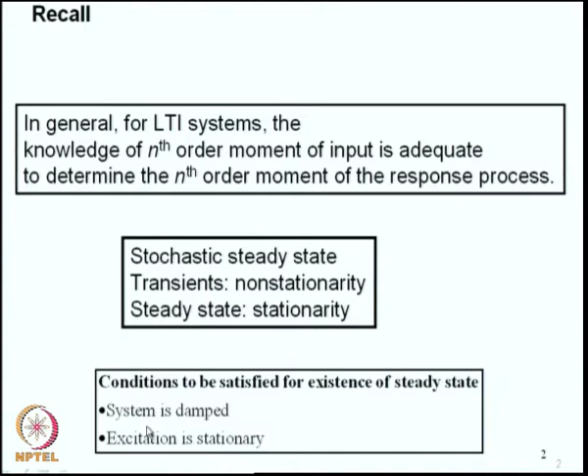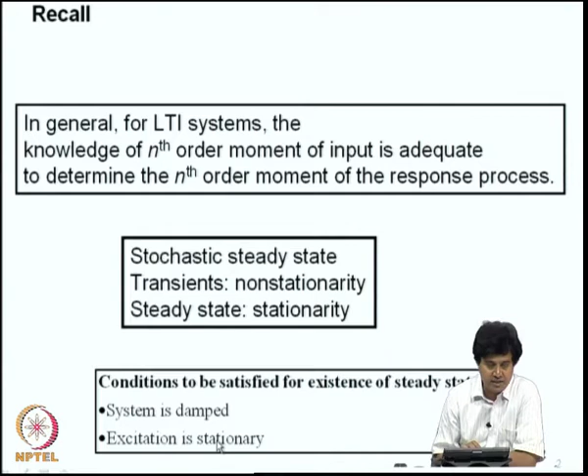For the system to enter into a steady state, the conditions to be satisfied for existence of steady state are that the system should be damped and excitation is stationary. If system is undamped, no steady state is possible, and similarly if you apply an excitation which itself is not stationary, there is no possibility of a stationary response.

The input output relation in frequency domain related the power spectral density function of the response to the power spectral density function of the input through a transfer function which is a square of the frequency response function. This is valid only in the steady state. We will continue this discussion.

Now, we will consider the response of a single degree of freedom system to a stationary random excitation. Till now we have considered f of t to be a white noise process. Now, we will consider more general forms of stationary random inputs. We will consider that the system starts from rest and mean of the excitation is 0, and the autocovariance of the excitation process is given by this, where the autocovariance is function of the time difference T2 and T1.

We will start with the Duhamel integral representation for the response. Since the system is starting from rest, the Duhamel integral representation provides the complete solution. h of t is the impulse response function, f of t is the excitation. Now, if you take expectation on both sides, you get expected value of x of t is expected value of this integral, and that itself is this integral 0 to t h of t minus tau, expected value of f of tau d tau, and since expected value of f of t is 0, it follows that expected value of x of t is 0 in this case.

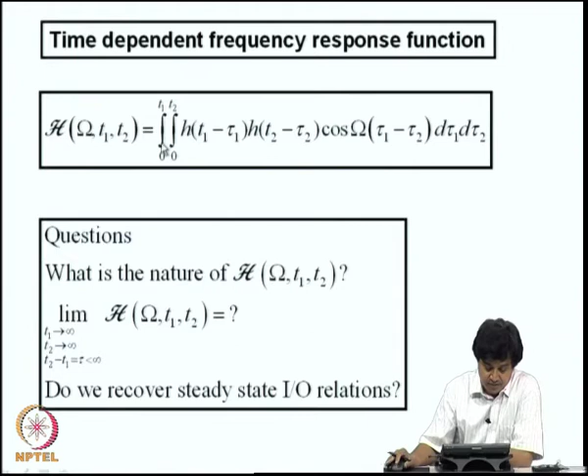Now, the impulse response function is given by this for a damped single degree of freedom system. If I now substitute this into this integral for h, this is a known function. So, for h of t I will write this function and carry out this integration. If I indeed do that, I get this lengthy expression. This h of omega whole square that appears here is the modulus square of the frequency response function that we have encountered already. This capital omega is a frequency parameter which appears at various places here.

Now, clearly this h is a function of both t1 and t2, although at a few places the time difference also appears, but if you look at these multipliers, it is a function of t1 as well as t2. Now, if I consider the limit of t1 going to infinity, t2 going to infinity and t2 minus t1 is tau, which is finite, what would happen? Clearly these exponential functions, since they are multiplied by time and time goes to infinity, go to 0. So, these terms inside the brace will vanish because I am multiplying by an exponentially decaying function, and therefore, these two terms will vanish.

Similarly, there is another term here inside this brace, which is multiplied by minus eta omega t1 plus t2. As t1 and t2 become large, this function also becomes 0. Therefore, the only term that we will be left with will be this h of omega whole square into this cosine function. Please notice that there is a bracket running across these terms, it begins here and ends here, and the entire term within the bracket is multiplied by h of omega whole square. So, what would remain as t1 tends to infinity and t2 tends to infinity, with t2 minus t1 being tau, is only this term h of omega whole square cos omega tau. So, I get this one.

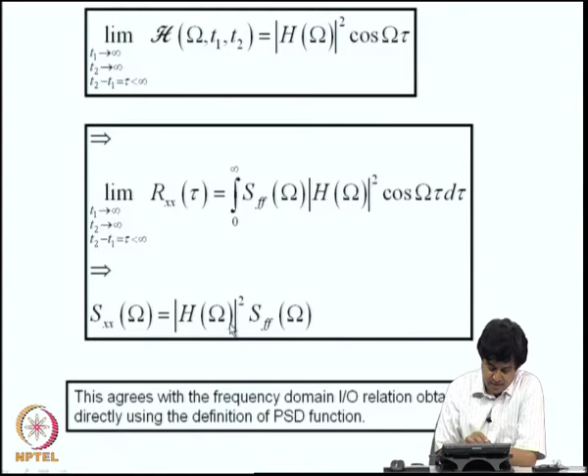So, therefore, under these limiting operations, the output autocovariance function is given by SFF of omega h of omega whole square cos omega tau. Now, seeing that this is nothing but the Fourier transform of Rxx of tau, we can infer that the output power spectral density function is given by h of omega whole square SFF of omega, and this is what we have already derived by using a frequency domain analysis of response in the steady state. So, this agrees, and it is nice to be able to verify that.

So, we have the output power spectral density function is input PSD multiplied by square of h of omega. So, the steady state variance is given by area under this function and this is given by this. Suppose if we take the case of a white noise, then the output PSD function, if I now substitute into this, I would end up needing to evaluate this particular integral 0 to infinity, and this is a rational function, a polynomial in omega.

Evaluation of such integrals can be carried out using Cauchy's residue theorem, using contour integration in complex plane. I leave that as an exercise, and the exercise is to evaluate this integral using the residue theorem and show that this steady state variance is equal to the value that we have already derived using frequency domain analysis.

There are few integrals that will be useful in frequency domain analysis of randomly driven systems. I have provided it here. The structure of these integrals are as follows. In the integrand we have ratio of two polynomials in omega, and for different values of n, for example n equal to 1, h1 of omega is b naught by something like a plus omega, and I1 is given by this value.

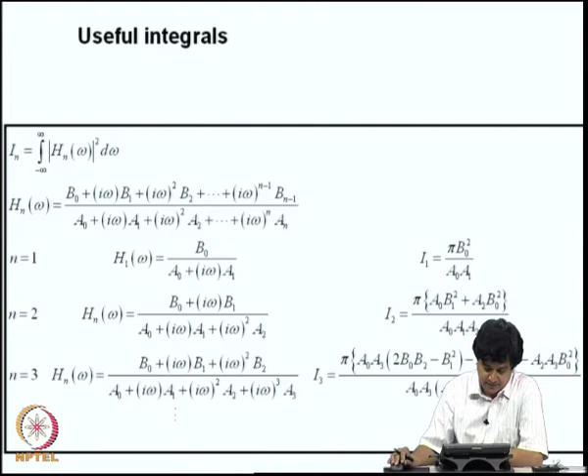We have seen that the steady state response variance is given by this integral 0 to infinity h of omega whole square SFF omega d omega. If SFF omega is a white noise process, then it will be a constant and we will be left with evaluation of the integral 0 to infinity h of omega whole square d omega. But if SFF omega is not a white noise, it may be possible to evaluate this integral using an approximation which is explained as shown here.

So, for purpose of an approximation, in regions where the frequency response function has significant values, we can approximate the power spectral density function as a constant, and we can ignore this variability. So, if I now replace the power spectral density here by its value at capital Omega equal to omega n, and pull it outside, that means you are basically applying a white noise excitation pitched at this value.

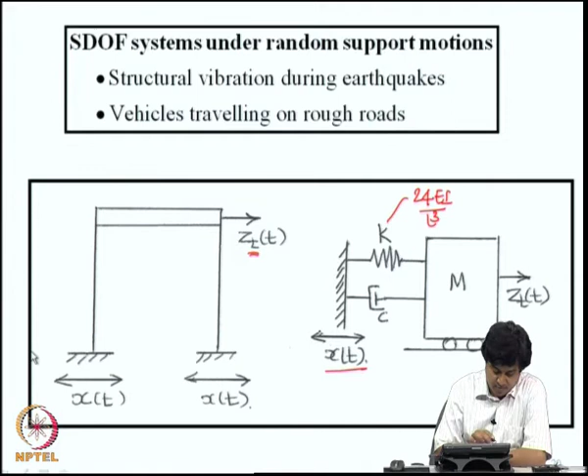If we now set up the equation of motion for this vehicle, we will get this equation. Mu double dot is the inertial force, and the force in the damper is c d by dt of u minus y of x, where x is vt plus half a t square. Similarly, the force in the spring is k into u minus y of x, where x is vt plus half a t square, with the initial conditions u of 0 and u dot of 0 specified.

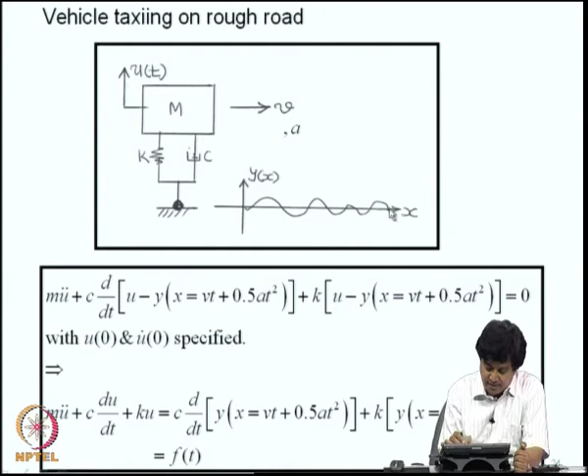So, we can write this equation as mu double dot plus cu dot plus ku equal to c d by dt of this plus k into y of this. So, this is the force that acts on the single degree freedom system. Clearly, if y of x is a random process, this f of t would also be a random process. There can be additional complexity due to any uncertainties in the vehicle's velocity and acceleration that also would affect this right hand side. Therefore, f of t would be a random process.

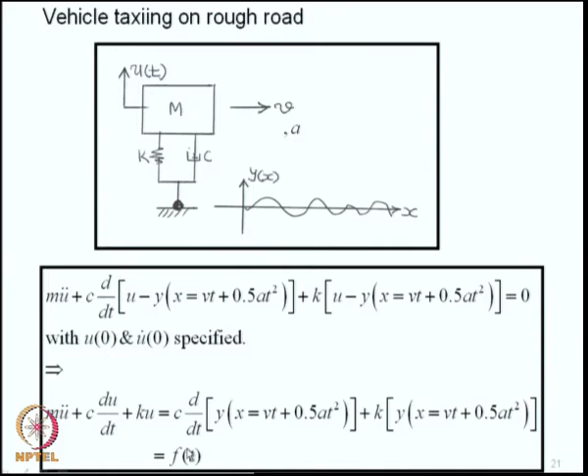Okay. So, a structure which is subjected to support displacement where guideway unevenness is a random process is again equivalent to a single degree freedom system with a random excitation on the right hand side. Let us consider this problem of support motions on a portal frame and try to formulate the problem a bit further. So, we start with this model for portal frame. This is a physical model, and based on the free body diagram of the mass here, I can write the equation of motion as shown here.

M zt double dot is the inertial force, and c into zt dot minus x dot of t is the force in the damper, and k into zt minus x is the force in the spring, and the sum of these forces must be equal to 0, and these are the initial conditions. So, if I divide now both sides by m, I get the equation in the standard form: zt double dot plus 2 eta omega n zt dot plus omega n square zt equal to, now the forcing function is in terms of support displacement and support velocity.

Now, I can also write an equation for the relative displacement of this mass m relative to the support. So, if I now introduce a variable z which is zt minus x, I can substitute that into this equation. Zt minus x already appears here and zt dot minus x dot appears here. So, these two terms will simply become cz dot and kz, but this m zt double dot will be m into z double dot plus x double dot, and that m x double dot I take to the right hand side. And these will be now the initial conditions.

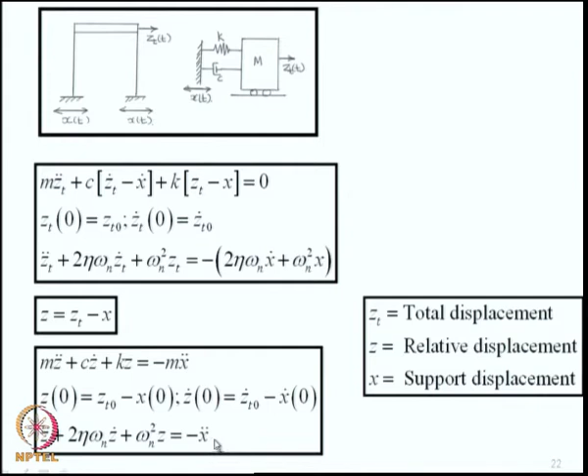Now, if I model x of t as a stationary random process, can we do a steady state response analysis and find out the power spectral density function, for example, for total displacement? If you want to do that, we start with this equation. On the right hand side, I have 2 eta omega n x dot plus omega n square x, and the solution for zt of t will be a transient part plus this Duhamel's integral h of t minus tau into 2 eta omega n x dot of tau plus omega n square x of tau d tau.

In the steady state, we have to find now the PSD of the input. It can be shown to be given by omega n to the power of 4 plus 2 eta omega n omega whole square Sxx of omega, where Sxx of omega in this particular example is the PSD of the support displacement. Therefore, the output power spectral density function is given by this relation. The variance of the total displacement is area under this curve, and that is given by this.

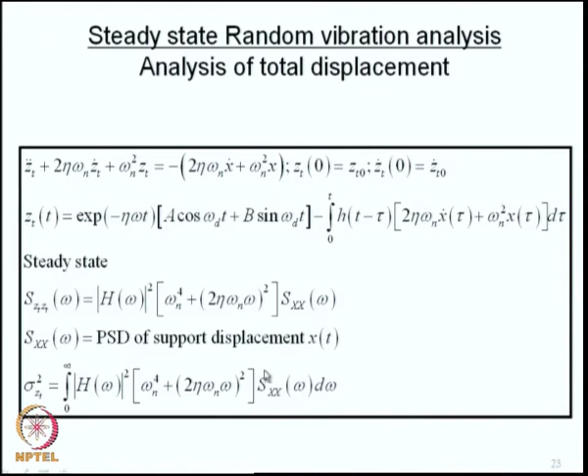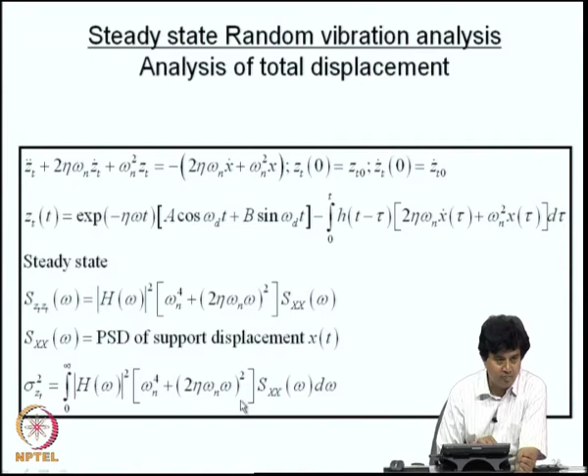So, if you know the power spectral density function of this, you can evaluate this, and if it is for example a Kanai Tajimi type of power spectral density function, we get in the integrand ratios of polynomials in omega, and we can evaluate it using the list of integrals that I showed earlier, or use Cauchy's residue theorem on this and evaluate the variance.

A similar analysis for relative displacement z of t, if we consider, then the equation governing z of t is this, and the solution in terms of initial conditions and Duhamel integral is this. Clearly, the output power spectral density function is h of omega whole square into the power spectral density of the right hand side, which is x double dot of t, and the power spectral density function of x dot of t we have already shown is omega square into power spectral density of x.

So, the power spectral density function of x double dot will be omega to the power of 4 into the power spectral density function of the displacement. If you use this, I get the output power spectral density. You integrate this function from 0 to infinity, you get the steady state variance.

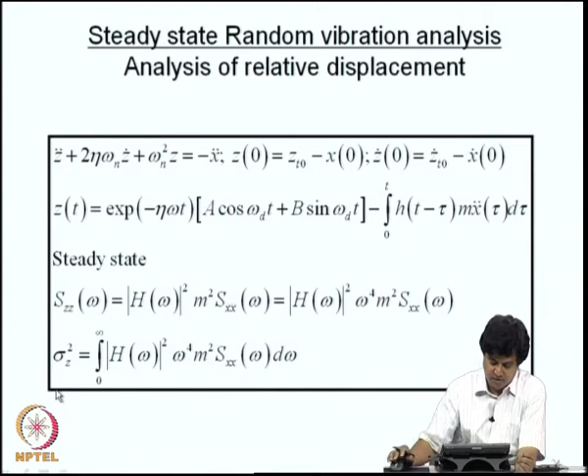Now, in studies of long span structures, often the two supports of the system may suffer different support motions. So, a simple archetypal model for that would be a portal frame, where one of the legs is subjected to support displacement x of t, the other leg is subjected to displacement y of t. A model for this would be of this form.

It is a single degree freedom system with two supports, and the left hand support receives the displacement x of t, that is due to this, and the right hand support receives displacement y of t, which is due to this. This k by 2 is the stiffness of this column, and we are assuming that the two columns are identical. Therefore, this is k by 2 and k by 2, this c by 2 and c by 2.

Now, in this particular case, the notion of a relative displacement is not obvious because the two supports move differently. So, there is no unique definition for a relative displacement, it could be with respect to this support or this support. So, that is not how we will talk about relative displacement in this case.

Instead what we do is we consider the total response Zt of t to be made up of two components, namely a pseudodynamic response and a dynamic response. What are these things?

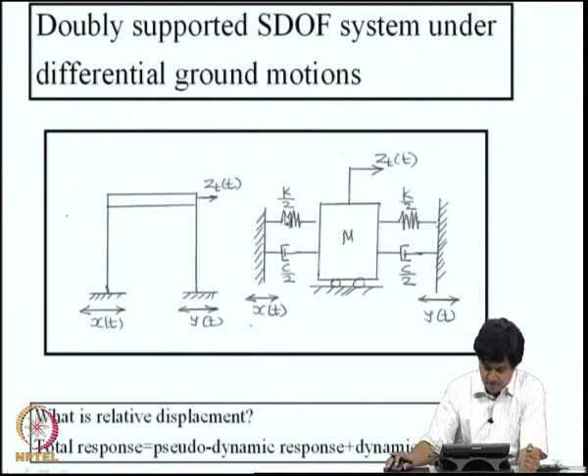Suppose for purpose of discussion we take the force in the left spring, whatever force exists in that, as a response variable of interest. So, that is k by 2 into Zt of t minus x of t. Now, Zt of t is written in terms of a dynamic component and pseudodynamic component. If you rearrange these terms, I get this force in terms of 2z minus x minus y. I can define another quantity g of t, which is 4f divided by k, so that I can focus on the quantity 2z minus x minus y. This is related to the force in the left spring.

Suppose now I ask what is the variance of g of t, what is its power spectral density function. We could go ahead and do this analysis. Z is this and Z of omega will be this, and h naught of omega is the frequency response function which is given by this.

Here X_T of omega is written; the Fourier transform of x double dot is written in terms of the Fourier transform of displacement, that is the truncated x of t. That is why we are seeing omega square here. That omega square is pulled out here and I get this.

So, S_GG of omega, if I use this definition of the power spectral density function, this is given here, and G_T of omega, G of t is 2 z of t minus x plus y. So, if I do this, I get this, and S_GG of omega can be shown to be given by the auto power spectral density function of the left hand side support excitation multiplied by one transfer function, the auto power spectral density function of the excitation at the right hand side multiplied by another transfer function, and another transfer function H3 of omega, which multiplies the amplitude of the cross power spectral density function between x of t and y of t, x double dot of t and y double dot of t.

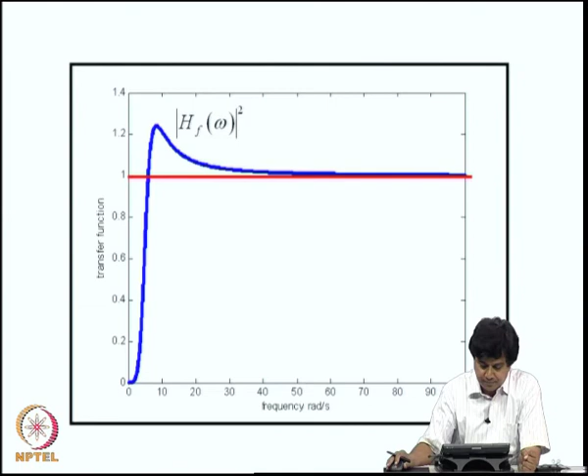By rearranging the terms in H1 and H2, we can also show that H1 and H2 have this representation, and if you carefully observe this, you can see that H1 and H2 are non-negative, they are actually positive. So, if you look at this expression for variance, we see that the first 2 terms essentially make positive contribution, and the third term can make either a negative or a positive contribution.

So, if we now ask the question, what should be the nature of cross power spectral density function which produces highest or the lowest variance? That will be controlled by this product. Basically, that will be controlled by the nature of this H3 of omega. If Sxy is 0, that is when x of t and y of t are independent, then we get of course the variance to be simply the sum of contribution from first two terms.

If it is fully coherent, that means if this is equal to product of Sxx into Syy, I get another value of this. One may be tempted to think that these two represent limiting values of the variance of G, but it turns out that they are not the limiting forms which lead to highest and lowest variance. So, I leave this as an exercise for you to determine the nature of this cross power spectral density function which produces the highest variance and the lowest variance.

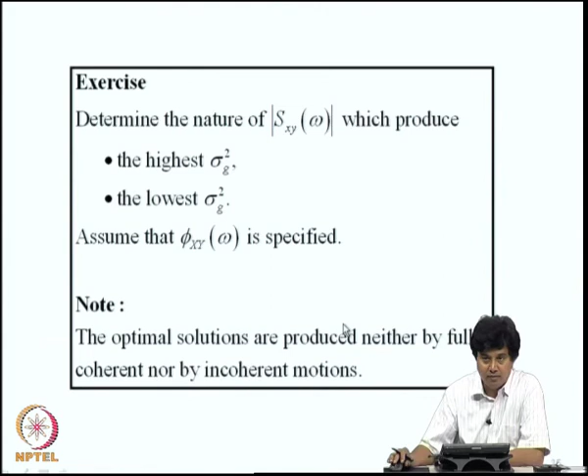You could assume that phi xy of omega is specified, and a hint to this solution is that the optimal solutions are produced neither by fully coherent nor by incoherent motions. That means there exist special forms of cross power spectral density functions which produce the highest response. So, in case you do not know the properties of the cross PSD function and you want to get the worst response, you can use these optimal cross power spectral density functions and get an idea of what could be the highest variance.

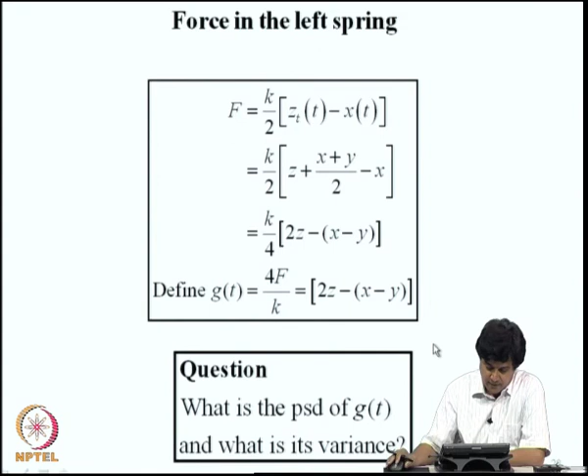There is another exercise associated with this problem. We have shown the variance of the response in terms of contributions from auto PSD of x, auto PSD of y and cross PSD of x and y. Another way of looking at this is, if you look at the way we have written the response, we had a pseudostatic component and a dynamic component. Z of t, the total response, is written as a dynamic component plus pseudostatic component. So, if you look at the variance of any of the total response quantities, it will have contributions from variance due to the pseudostatic component and variance due to the dynamic component, and another contribution which comes because of correlation between dynamic and pseudostatic components.

So, we can also write the variance of the response. If you rearrange these terms in a slightly different manner, you can show that the variance of the quantity G of t consists of a contribution due to the pseudostatic component, a contribution due to the dynamic component and a contribution due to correlation between dynamic and pseudostatic components. If you do that, you can show that the pseudostatic component is given by this, the dynamic component by this and the correlation component by this. This I leave as an exercise. This essentially requires rearrangement of these terms.

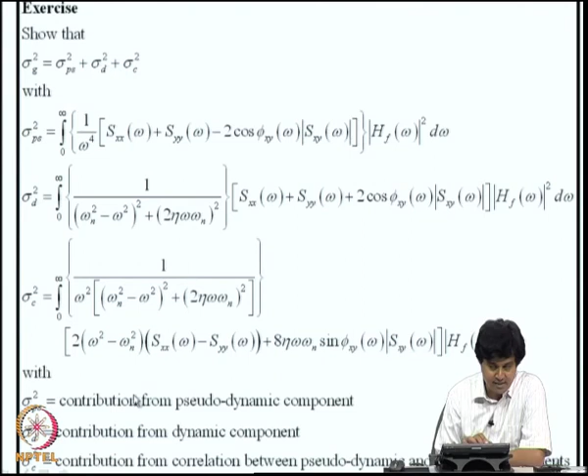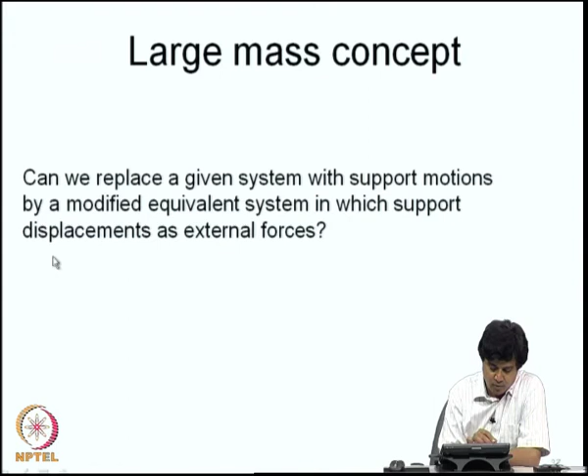In problems involving support motions in computational modeling, many finite element softwares do not have the capability to apply support displacements. Instead, they convert the problem of a support displacement into an equivalent problem of an external force. How is it done? There we use what is known as the large mass concept. The basic issue here is, can we replace a given system with support motions by a modified equivalent system in which support displacements are replaced by external forces.

To consider that problem, we will consider a simple example, a problem of differential support motion where one of the supports does not actually move, the other one moves by x of t, and let us assume that x of t is a harmonic displacement. We can easily write the equation for this in terms of the displacement, and I can get the steady state value of z of t given by h of omega exponential i omega t, and h of omega is this transfer function. You can easily do that because this is the equilibrium equation, and on the right hand side I have a harmonic driving. In the steady state, the response also would be harmonic at the driving frequency with an unknown amplitude h of omega. If you substitute this into this equation and rearrange the terms, you can easily derive this.

Now, what is done in using the large mass concept is, this support is replaced by a huge mass. These are point masses, the size of the rectangle is not so important, but just to pictorially represent that this is a large mass, I have shown a larger rectangle here. The support is replaced by a large mass and the degree of freedom is released, and on this mass we apply a force minus m x double dot of t. What is x of t? X of t is the support displacement here. What have I done? I have removed this support and added a large mass there. On the large mass I am applying the force m x double dot, but the support is now removed. So, this now becomes a 2 degree of freedom system.

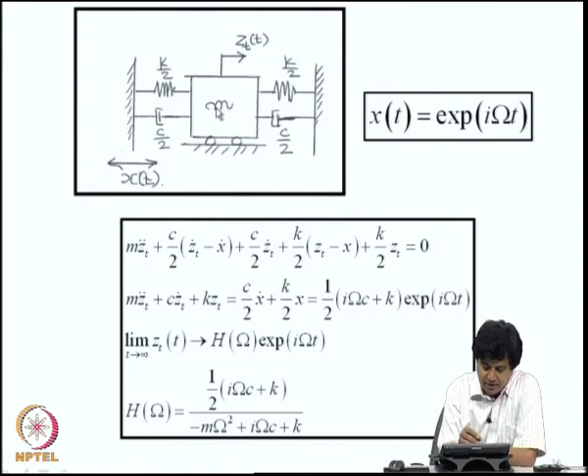Now, the claim that is being made here is, as this mass becomes large, the amplitude of response of this mass for this 2 degree freedom system approaches the amplitude of response of this system for large times. That means, the amplitude of response here is h, whereas amplitude of this mass here is capital V according to this notation. So, the claim is limit capital M tending to infinity V of omega goes to h of omega.

So, you could analyze a single degree freedom system under one support motion by studying an equivalent problem for a 2 degree freedom system where there is no support motion, but there is an external excitation. Many softwares are geared to handle external excitations rather than support motions.

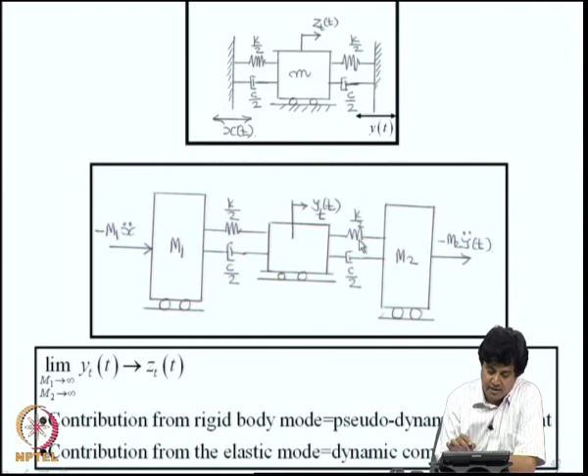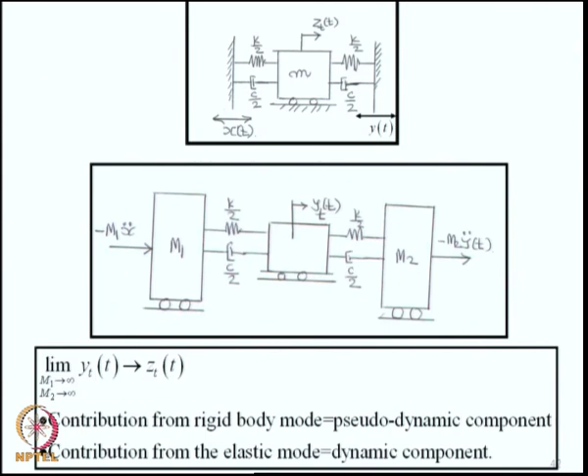But here you should see that this has a rigid body motion possible, because omega equal to 0 would be one of the natural frequencies, and consequently you can show that the contribution from that rigid body mode would be the pseudostatic response for this system, and the contribution from elastic mode will be the dynamic component of the response. So, this is one useful trick that is done if you are modeling vibration of large systems using say finite element methods.

So far we have been talking about response covariance, power spectral density, mean, variance, so on and so forth. How about the probability density function of the response? That question we have not yet addressed. We will start with the case of f of t being a 0 mean Gaussian random process.

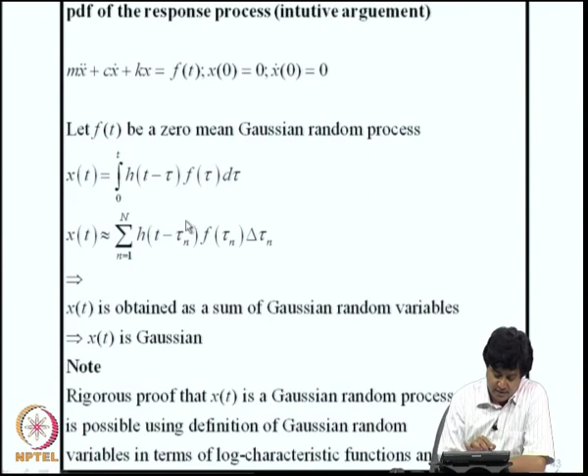But a more rigorous proof of this can be obtained by considering the characteristic functional of f of t and study what are known as its cumulants. I leave that as an exercise, but for purpose of preliminary understanding, this argument should suffice.

Another small exercise in this context would be if you consider now the derivative dx by dt. We have already defined the derivative of a random process in the mean square sense. That is given here. If this limit is interpreted as limit in mean square sense, this will be the mean square derivative of random process x of t.

Now, let x of t be a 0 mean Gaussian random process, and suppose if I define y as x2 minus x1, where x2 is x of t plus h by h and x1 is x of t by h, where h is, we are not still imposing the limit h going to 0, some finite non-zero quantity. We can easily show that y is Gaussian, and we can write the probability density function of y. Now, the exercise I want you to tackle is you have to examine the limit of this probability density function as h goes to 0.

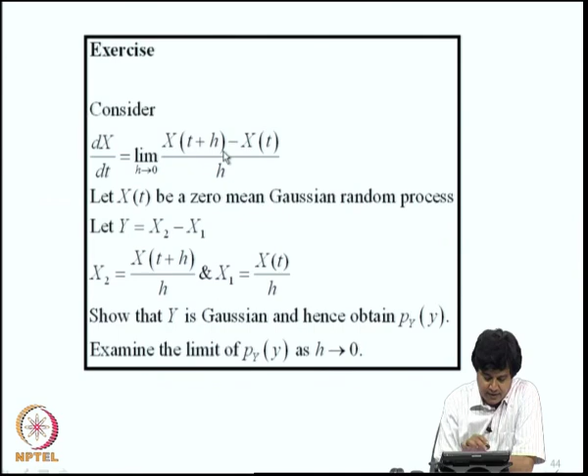The limiting operation here is on density function. It is quite different from the definition of limits in mean square sense. So, the discussion of this should be with reference to the two different modes of convergence that we are using.

If we now consider the PDF of the response process, we have now taken that x of t is also a Gaussian random process. What it means? The first order density function is given by this. A second order density function, I am now not writing the expression, but I am notionally representing as normal random variable with 0 mean and covariance given by this. If you consider n time instants, this will be an n dimensional Gaussian random variable, the mean continues to be 0, R is n by n covariance matrix.

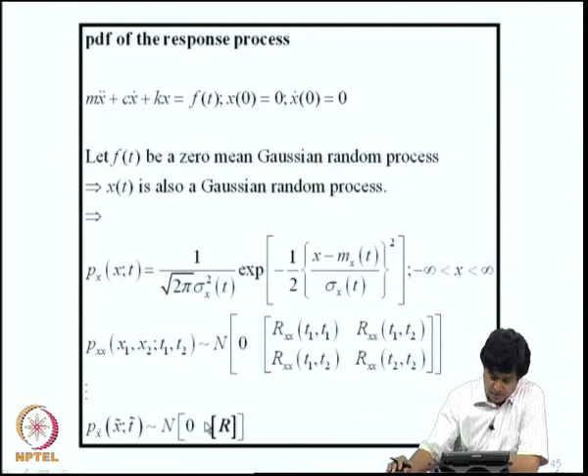Now, typically we are interested in answering the question, what is the probability that the response stays below a safe limit alpha for a time duration 0 to t. When we say x of t is completely specified, when I know its nth order probability density function, will such complete description of x of t enable you to answer this question or determine this probability? I am not sure. Why?